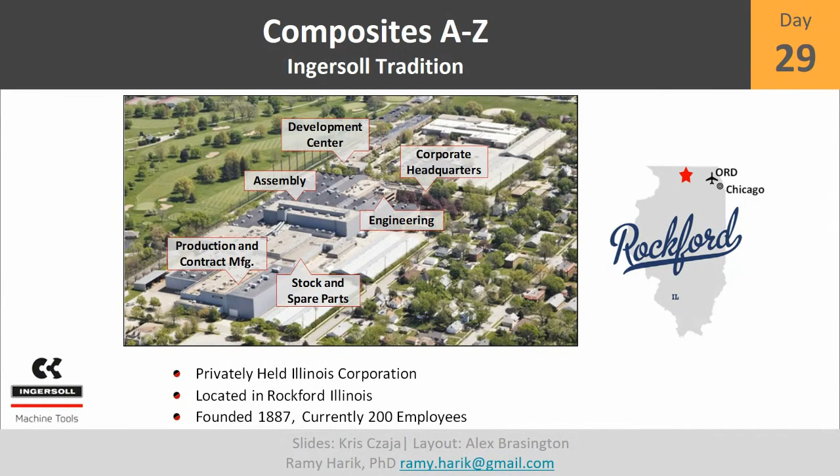Sure. Yeah, so Ingersoll has been around for a long time. This is a shot of the aerial view of our facility. All the big buildings you see there, that's all Ingersoll campus. The golf course just behind the building is actually the Ingersoll golf course as well, founded in 1899. Even all the houses around there were basically built to house Ingersoll employees as the company was revving up. So it was founded actually in Rockford - where we are right now is in Rockford, Illinois, and we've been there since 1891, I believe.

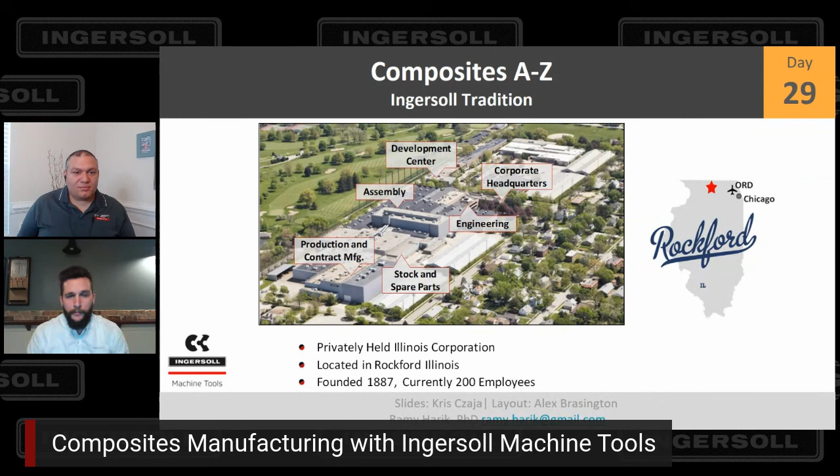For a short period of time, we were actually in Ohio, and then they moved the company to Rockford, Illinois, because of its natural beauty, and it already had some tradition for fine craftsmanship - for building pianos and furniture and things like that. So there was a workforce already available that the original founders basically built on and used to start building machine tools. We started pretty quickly getting into very large scale machines - by 1906, we had already built the largest milling machine of the day at about 400,000 pounds. We still continue that to this day, just building really unique, really large machines.

All right, this is awesome. So I'm trying to situate myself.

When is this... so this is the engineering building. I'm trying to remember where the entrance is. I've had long walks in Ingersoll, and it's been crazy, but I can't situate where the entrance is. Is it here, next to the engineering building? Yeah, basically—that arrow on the engineering building is pointing towards the entrance. It's kind of between the development center arrow and the engineering arrow, right on that edge of the building, that's the main entrance. Okay, I've situated myself. Despite the size, it's surprisingly not big enough.

I know you said you've gone through lots of walks through there, but we're actually in the process right now of expanding. We built the DKIST telescope that recently came online and started taking pictures of the sun for us, which is really interesting. We built a framework for that, and now we have another contract for the Giant Magellan Telescope, which essentially means we're putting an extension onto our building to satisfy that contract.

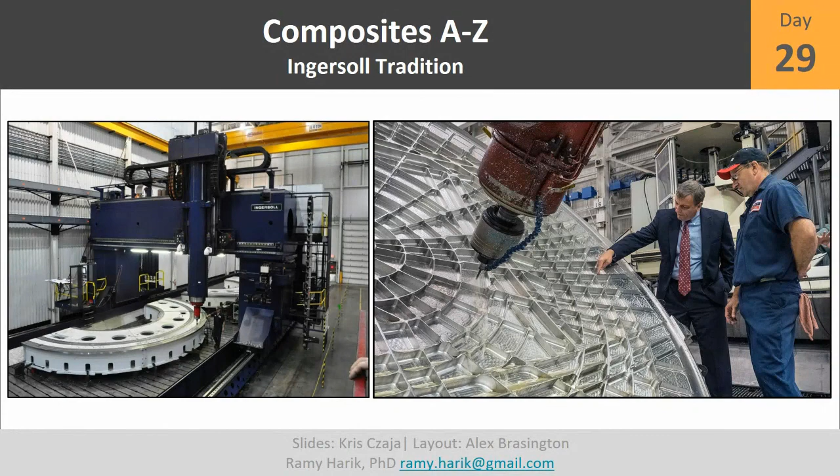So just to get a scale of this for people looking at this, I'm going to maximize the screen so you can see it on a larger scale, and look at the person in here—so that is the person. This is the size of the machine, and how gigantic is that? And this is the person in the machine, so this is pretty much impressive.

All right, and that's not necessarily the largest—we've built bigger machines than that: 5-axis, 6-axis, 7-axis, 8-axis, and we take basically all of that tradition and apply it towards our AFP machines as well. So the terminology 'axis' for those of you listening has to do with degrees of freedom. The added degree of freedom adds an axis for a machine, and it's not linear—if you add complexity, if you add a degree of freedom, you're suddenly tripling, if not exponentially increasing, the complexity.

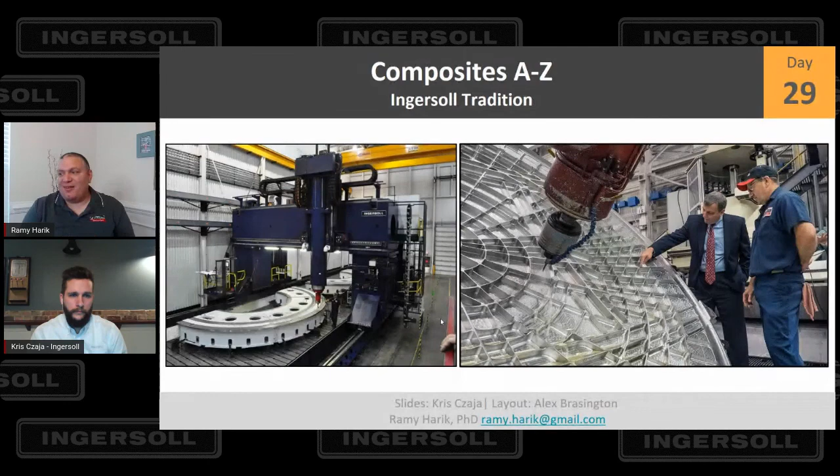Alright, so this is a composites show. That's good, we started with the tradition at Ingersoll. Talk to us a little bit about the AFP evolution, and of course we have a couple of cool videos prepared. But what is it that we're seeing here on the left and on the right?

Sure, so these are some of the original Ingersoll AFP machines. We kind of got into the large scale AFP space as soon as it was available. The machine on the left is an Airbus machine, and the machine on the right is in Alenia—Alenia is one of our largest production sites. We have 7 machines producing the 787 fuselages out there in Alenia. Those machines at Alenia are 32 by half-inch tow AFP machines, producing 787s all the time.

Yeah, I wanted to tell you the left one looks like an Airbus machine because they have their manufacturing process a little bit different, whereas Boeing has chopped their aircraft into sections of barrels.

Airbus has these different joining processes for them.

Going from that, I'm just trying to brainstorm for the world of AFP. Which one would you recommend? Do you prefer not having hoops, not having these circular patterns, versus having these joints, from an AFP perspective? Both of them, they are design-wise—this is not what we're assessing, a design. I'm assessing from a manufacturing perspective. Which one do you think would be easier?

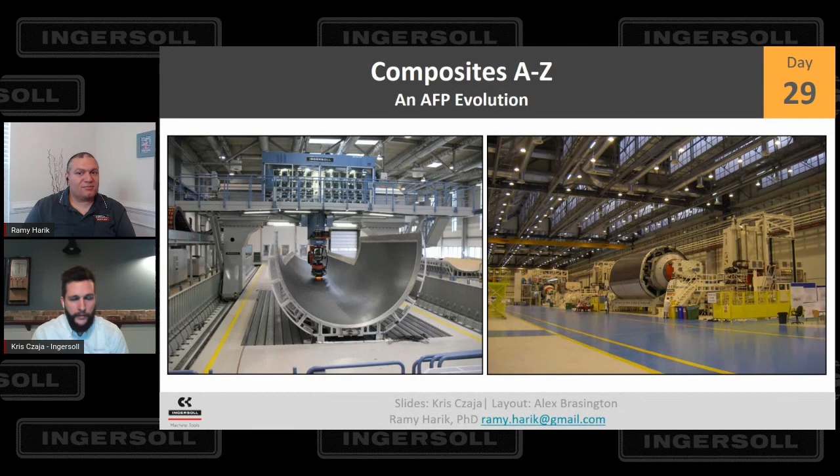I think they're about the same. The machine complexity ramps up a little bit with the barrels, with the headstock and tailstocks, because you have additional axes there. But it also allows you to go a little bit faster, because on the machine on the left, basically you have your XYZ axes that dictate how fast the machine can lay up. On the right-hand side, you could take advantage of that rotisserie in front, combining your XYZ linear feed rate with the rotisserie feed rate. Using that setup, you can go beyond the capabilities of just the linear axes.

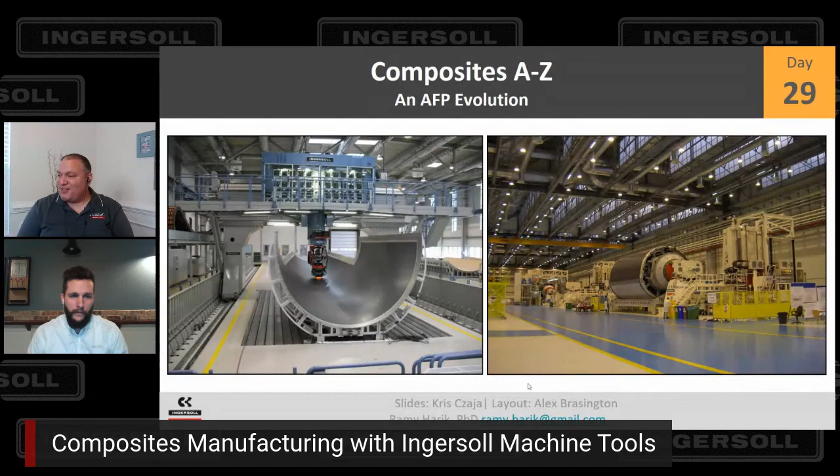Yeah, I totally see that. I was also thinking of programming. I don't know if this is a very quick assessment from my side, but I feel like the programming of parts that don't have these hoop elements will be a little bit easier than the other parts. But I guess it has to do with different—there are multiple reasons why you make a design a certain way or the other way around.

So, what is it that we're looking at here? We're looking at an up-close picture of the creel on the head-supported type of mechanism, and on the other side we're looking into—tell us a little bit, what is it that we're seeing here?

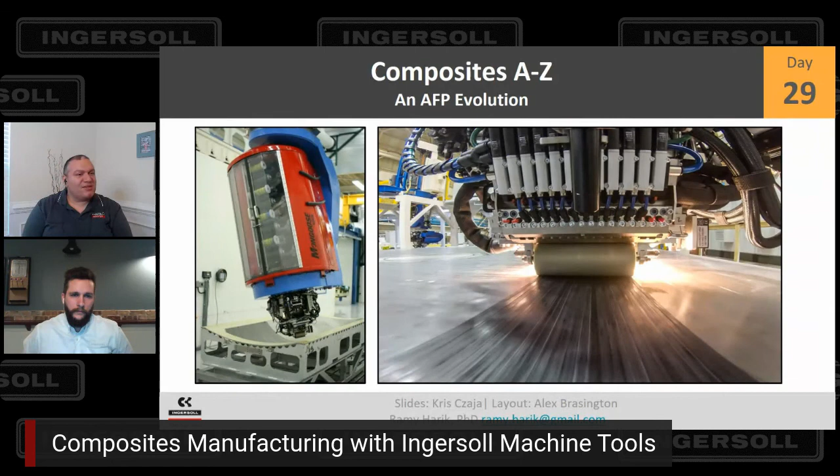Sure, so this would be kind of what we consider the next step in that AFP evolution. Those original machines had the creel housed off of the head, kind of far away—that was the way it was done originally. This is when we introduced our Mongoose module. We basically shrunk down that creel house and brought it closer to the head, but still allowing a lot of flexibility. This has been kind of Ingersoll's niche for a while. I'm biased, but I think we truly make the most flexible, capable AFP machine, and this Mongoose module was a large part of that.

We still have the ability to refrigerate and control humidity in that creel, but we bring it close to the head and reduce the contact points of the tow path.

So let me ask you a question. You're saying modularity—does this mean, like, I can imagine, and if I recall my memory the answer is yes, but I'll go ahead and ask it to you: the head can be deposited and you can pick another head and continue the layup while the operators are refurnishing the head with material and so on?

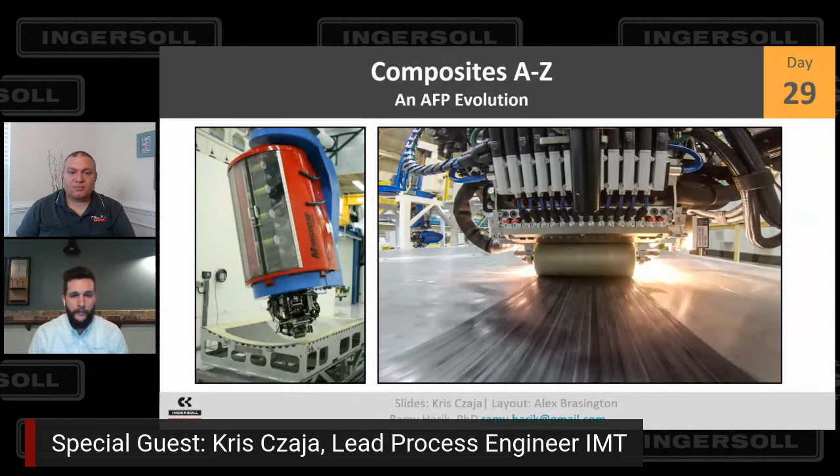Yeah, absolutely. So the image you're looking at on the left was our first Mongoose—that one is not modular, it's a fixed creel. But the one on the right is actually one of our more recent machines, there's an image of it a little bit later. That machine has several different end effectors, and they all can be picked up and dropped off automatically. It has two different AFP modules, both 24 by 1/4 for redundancy. It has a tape laying module, and an inverted robotic module that itself can pick up and drop off an inspection system and an ultrasonic knife.

So sometimes I do have questions—there are tons of people saying these are impressive, huge machines. I have a question: what is the porosity content in the cured composite from the AFP process? I don't think this is really relevant to what we presented, but if you want to take a stab at this question from Kumar.

It's kind of hard to answer. I think it really depends on your process and the material that you're using. Definitely, we want to be below that 1% level, I think for most of our thermoset layup processes, but it can vary dramatically. Your process can adjust to account for different porosity levels that you get raw coming out of the AFP process.

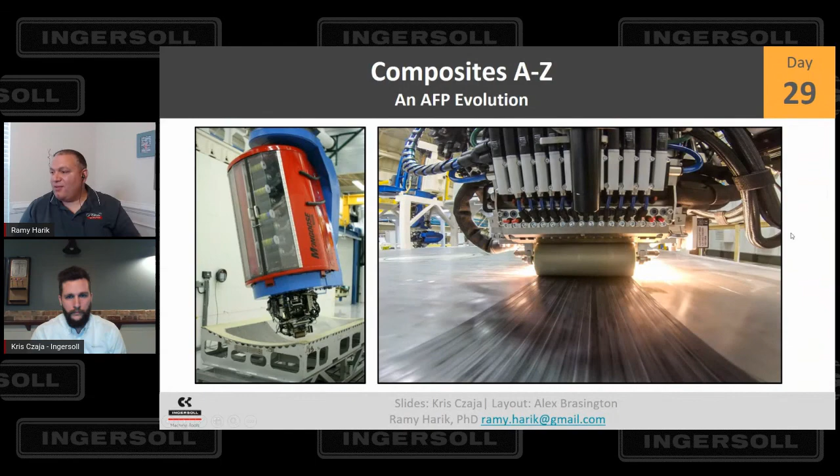Is that the machine that can actually go even all the way, manufacturing in the center and also on one of the sides? This is actually a pulled-out view of the machine that was on the right in the last image. It has two different AFP modules, the tape laying module, and an inverted robotic module that can pick up the inspection system and ultrasonic knife. This is, as far as I know, the largest gantry AFP machine in the world right now. We beat our own record when we made this one. It's 9 meters between the columns, and 14.5 meters of total wide travel.

So what the modules can do is they can actually go outside of that portal. Off to the left, there's a cantilever on the y-axis. So we can move outside of the portal and lay up on a headstock, tailstock outside of the gantry.

This is impressive. Where is this located right now? Are you allowed to say that? No. Okay, good, so that's a fair answer.

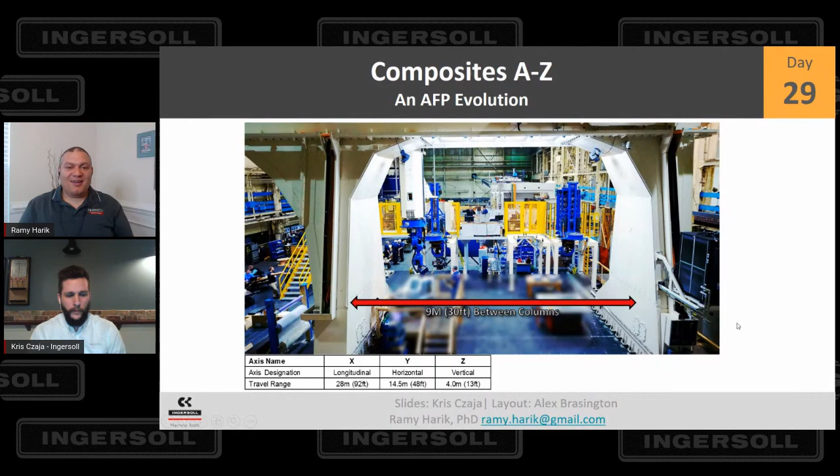Okay, all right, good. So talk to us a little bit about this slide. I can see in here the usage of the robotic arms as well as inverted processes. This looks like you guys have inverted the process: the tool is held by the mechanism that has the flexibility, and the head is stationary. So talk to us a little bit about this. And I have a question myself, like why would we be interested in inverting the process?

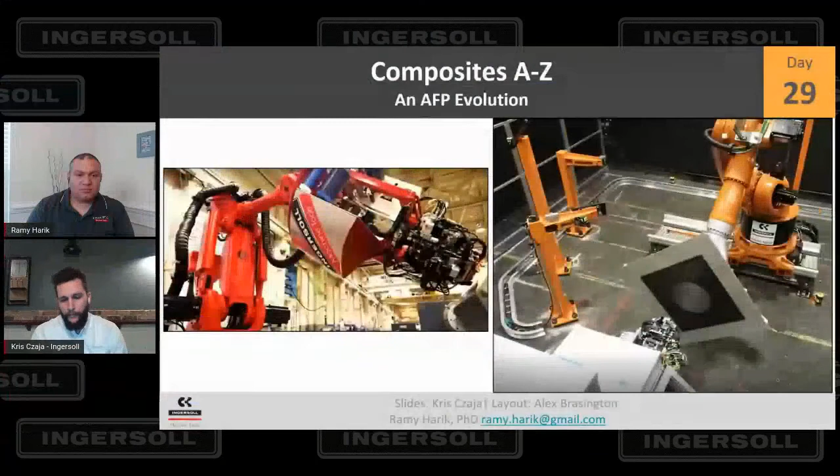Sure. As you've seen, we make really large gantries, but we understand that there's also a need for smaller AFP systems, what we'd call our mid-level or entry range for AFP purposes, or if you're manufacturing smaller parts and don't need a very large gantry. We do offer these robotic systems. There are some trade-offs there. A robot is just generally not going to be as accurate as a gantry, especially not the kind of gantries that we do, given the history we have and the kind of accuracy we're able to achieve on those gantries. But it has its place. It's less expensive, and it can be versatile and fast.

So on the left-hand side, there is what we would call our direct robotic fiber placement system, where you have the creel housed as the end effector on the robot. On the right is what we call our inverted system, where, as you mentioned, it's holding the tool and the creel is stationary. The system on the right is currently laying up a CDS, just a calibration plate that we have, but it's really designed for complex shapes in fan blades, composite fan blades. So that's a relatively small part, and having an inverted system like that, it's extremely fast, and it allows you to have modularity without changing end effectors. In this case, the CDS is facing the fiber placement module, completely stationary, completely fixed tow path, so very, very reliable.

And then it can rotate at the 45-degree angle. That's where we have our ultrasonic knife module, so the robot can basically just turn 45 degrees and access the ultrasonic knife, and then it can rotate fully to 90 degrees, and we have an automated inspection system there. That's our access system. Let me get up close a little bit to the slide so people can see that, and I'm going to be moving the mouse. So basically, you stated this is a CDS.

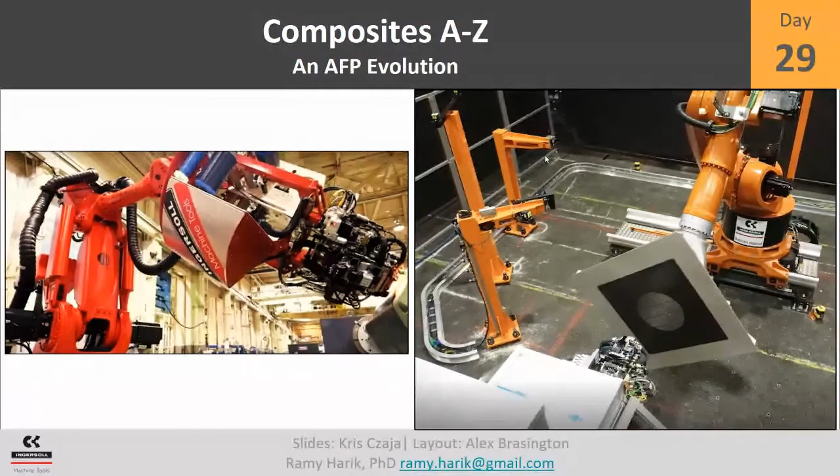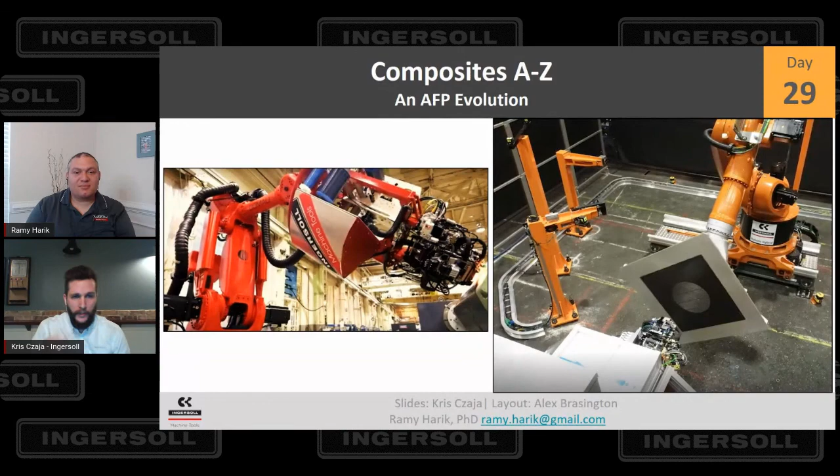We rotate 45 degrees to this location, where there's an ultrasonic knife for cutting operations. Then we can rotate 90 degrees and have profilometry-based inspection in this location. Is that accurate? That is accurate. And not pictured, but off to the right, there's also a built-in projection system. So just by rotating the A1 axis, I can access all of these different modules and functionalities. That is interesting, I like this.

All right, cool. So talking about the AFP Evolution, what is this, what are we seeing in here? So what you're seeing here is one of the newer products from Ingersoll. This is what we call our Hawk module. We talked before a little bit about our older creel houses housed off of the head, then we go to the Mongoose module, and this is the Hawk module.

So what you get here is a very ergonomic, very reliable head, very simple tow path. Everything is all fixed in place, and you gain easy access to all of the spools from a single location. You pay for that to some extent in flexibility of the machine to get into female parts, which is where our roll kinematic in the Mongoose module is really powerful. But for larger structures that are dominantly male, or what we call locally flat, without a lot of curvature, the Hawk module is really a great option.

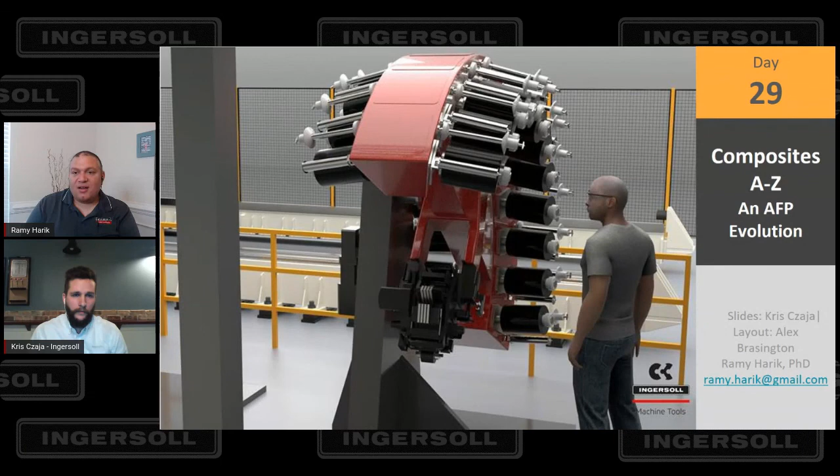All right, this is awesome. So looking once again into this, do I see in here that you can actually mount... I'm trying to count as quick as I can and I cannot count. How many, is this 32? This is 24 total. Okay, this is what got me off, 24. That's not really conventional. Is this 24 half an inch, or is this 24?

I think this rendering could be either one. We can house a 1/4 inch or half-inch spool, you just change out a few head components. It's even modular in that regard. But this one, I believe, is 24 by 1/4 inch is what it's showing.

And you would be putting spools from both sides, so am I seeing that correctly? From both left and right, this is where the head of the machine, the placement mechanism is, and this is where the creel is located from both sides. Correct. And this is obviously just a rendering, but this system is in production, we've sold this system now.

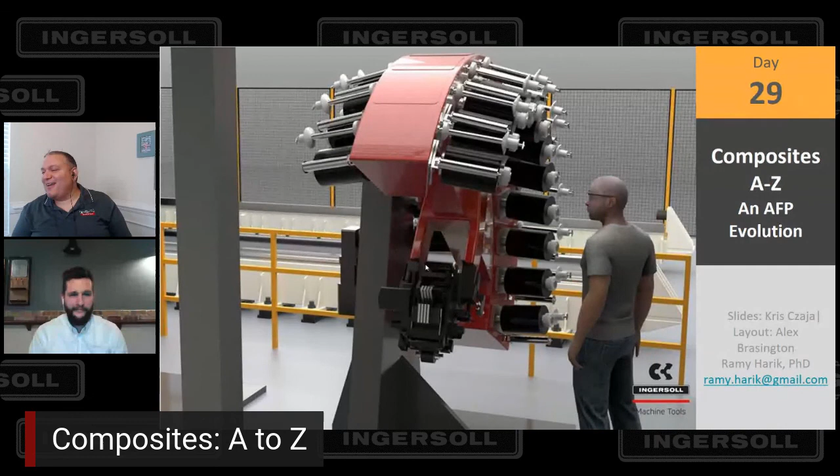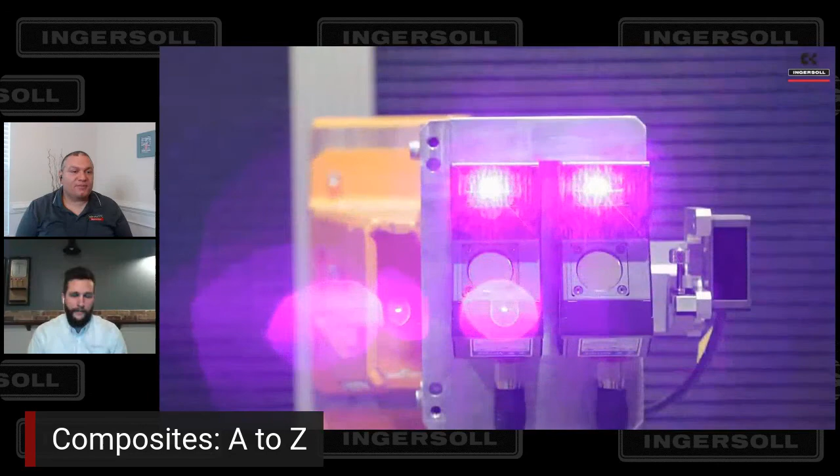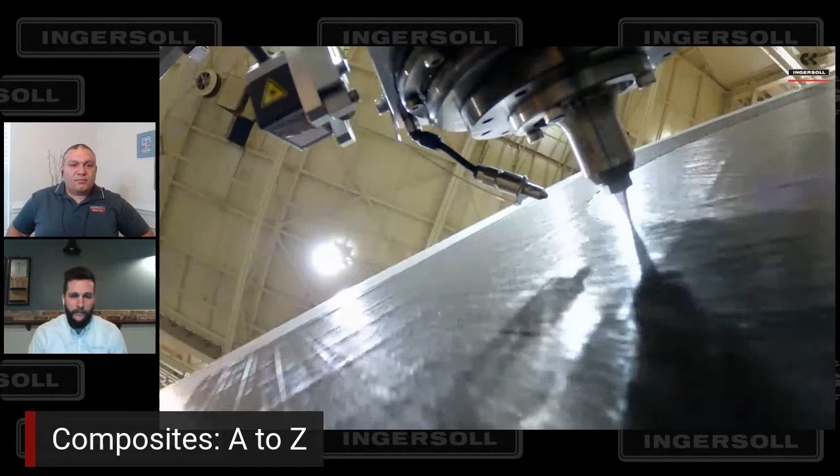All right, so we're gonna play a video next, hopefully it works well. We said we're gonna comment on this, Kris. So this is a video of our inverted robotic system, it'll show you very briefly a little touch on each of the functionalities of the system: AFP, ultrasonic knife for trimming, ACSIS for inspection, and then the projecting system.

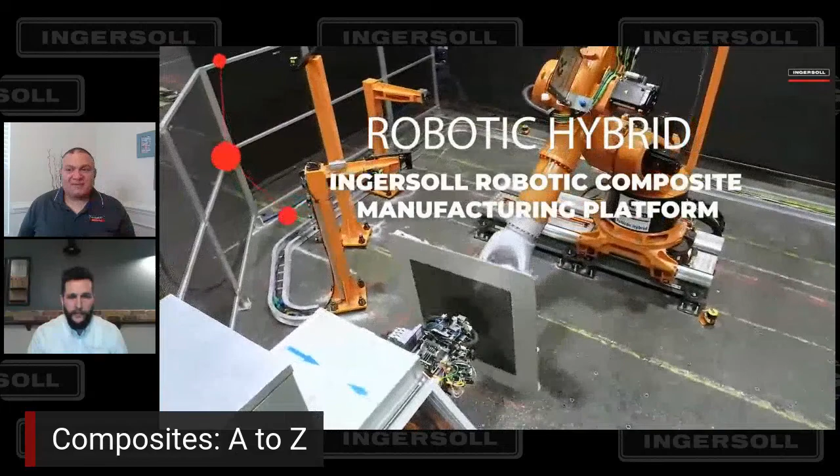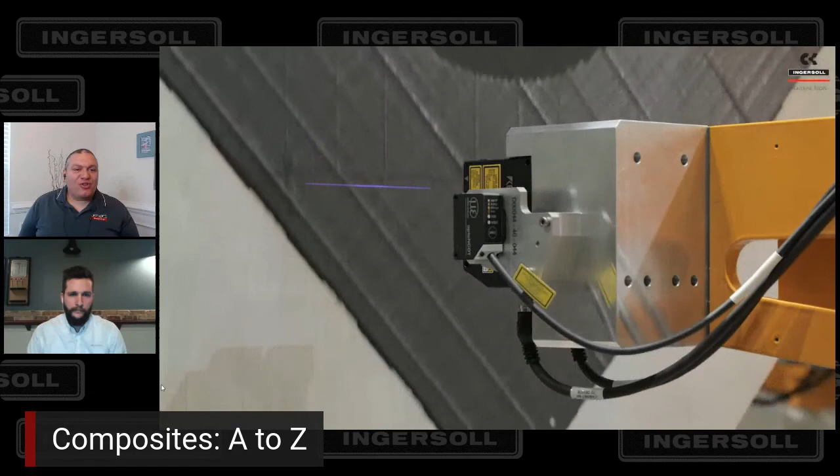So you see here the robot is doing the AFP process. It's a little bit choppy for me, but I hope it's coming through for others. Yeah, it is coming through. Talking on top of videos on the bandwidth is not super optimal.

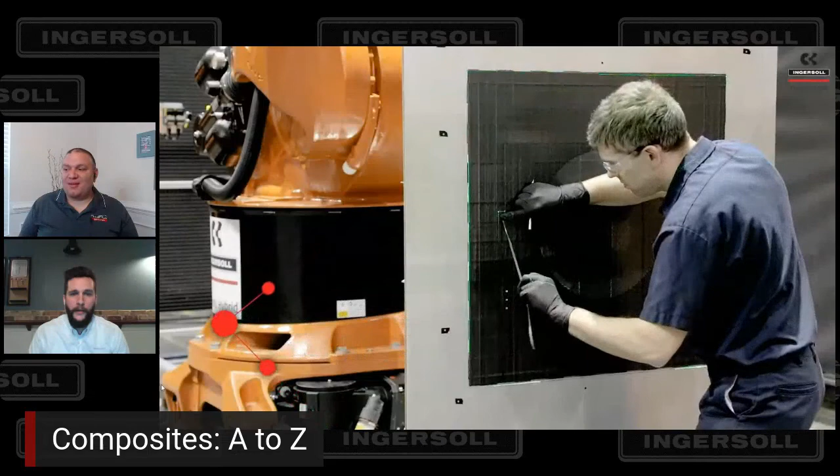Right, so there it just did a profilometric inspection, and here we have a projector which is highlighting one of the defects that the operator can repair. And then a close-up shot of that ultrasonic trimming operation as well.

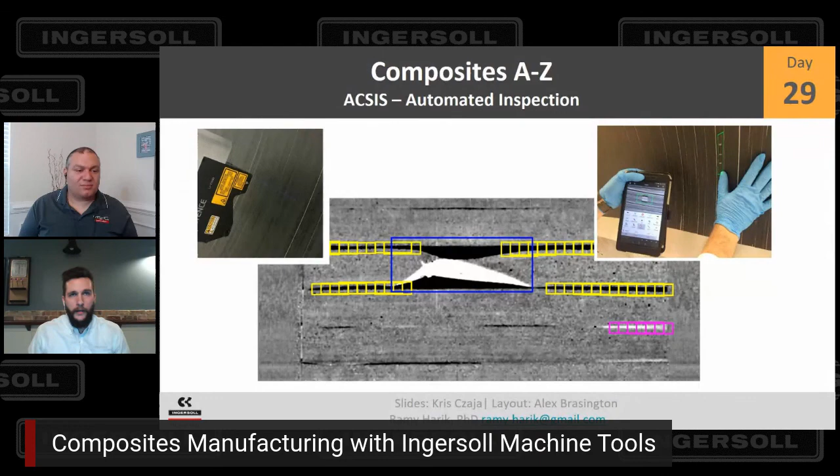We also have a smartwatch interface, which is basically the same functionality as the tablet, just on a smaller screen, so you don't have as much real estate there—it just shows one defect at a time. And then we also have an augmented reality interface using the Microsoft HoloLens, so your hands can be completely free. Augmented reality is really interesting; it allows a lot of different capabilities in terms of the information you can convey to the operator. It's a really rich, deep source of information.

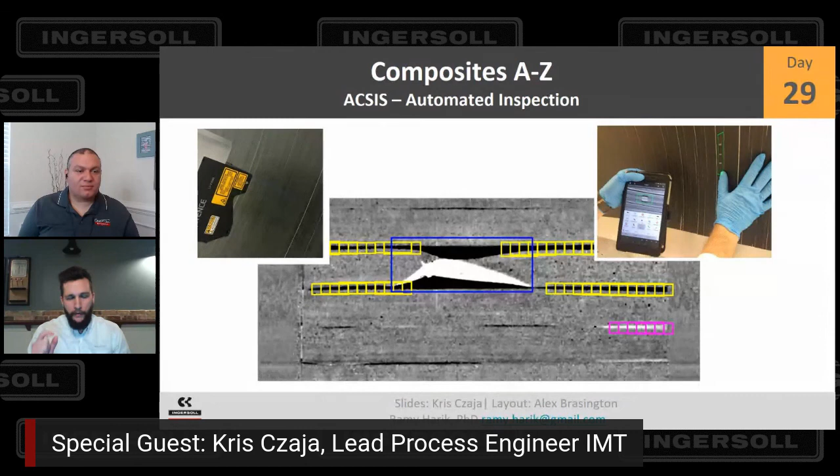But at the same time, you pay for that—there's always some give and take in positional accuracy. Whereas with the projector you can get really sub-millimeter accuracy in where you're projecting the location of these defects, the HoloLens and augmented reality is more of a ballpark, I'd say—more like centimeter accuracy. It's enough to point you toward that defect so you can go repair it, but if you need really precise boundary projection, for example, you're not going to get that from the augmented reality system. Not yet, anyway.

Yeah, we'll see. So you mentioned several things—one of them, facility. What Kris was talking about is the McNair Center at the University of South Carolina, this is where I work. And tomorrow we're actually going to have the finale of the 30 days with my research team, and we'll see that tomorrow.

I do have a question for you from Dr. Al-Najm. The question is, what measurement sensors are being used in the inspection system?

So these are Keyence profilometers. I don't think it's any secret that we're using Keyence, so I can go ahead and say that. I think you can actually see it in that image there. Yeah, the end of the word Keyence.

So we use a profilometric system. We kind of played around with image-based systems, using standard cameras. But the profilometry we find is so much more rich. You get that height information naturally. You're not going to get hung up by glares and things like that.

And then also there's a lot of little details people don't think about immediately with automated inspection: what do you do with all that data? We talk all the time about this digital thread and maintaining it. So if I have an automated inspection system and I've taken a bunch of high resolution images, what do I do with all those images? I can't just throw them out, because then I'm throwing out all the data I've gathered, and my digital thread is slightly severed, if not completely severed.

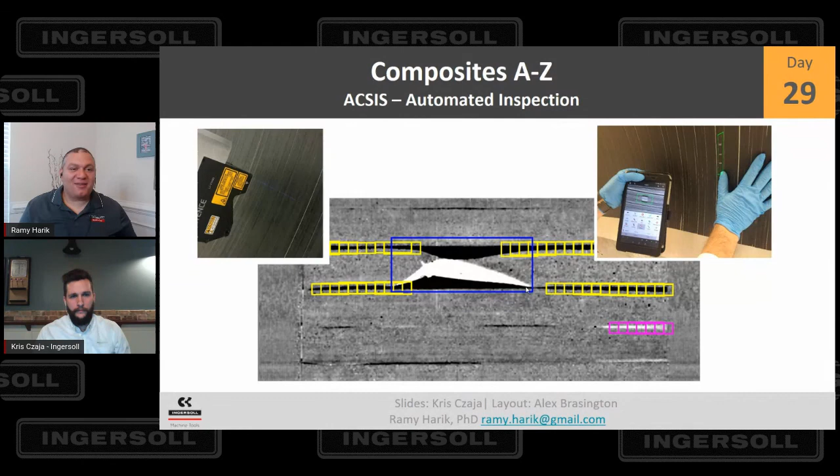You were right about something, Kris, is we can talk about this for 5 hours because we've spent on this chart the most since we started.

Talk to me a little bit about this full modularity. Is this what we're talking about? AFP machines that can drop a head, pick a head, and move the operation. There's something very particular I see here, milling. Why do you put milling in this loop?

So for a while now, Ingersoll has been driven by this modularity concept. We don't want you to have to purchase a new gantry to have different functionality, so we make all of our modules modular, as it were.

So everything from AFP to ATL, inspection, ultrasonic trim, all of these things go along with that automated fiber placement process. But then we also have a teaser for the next slides here, our large scale 3D printing and our mill heads. So you saw some of our tradition in milling.

So we're bringing all of those things together. In theory, you could basically 3D print a tool, mill your surface on the tool, drop off those modules, pick up an AFP module, and then AFP directly onto the tool that you just 3D printed. We want to leave that option open to anybody that wants to play around with it.

In reality, there are some hurdles to get over because you typically want an AFP in a clean room environment, and milling is inherently not a very clean process. But still, thinking towards the future, we want to make it an option so that whoever comes along and says, I have a use case where I want to do printing, milling, AFP, and automated inspection all on one machine, that it's right there, ready to go.

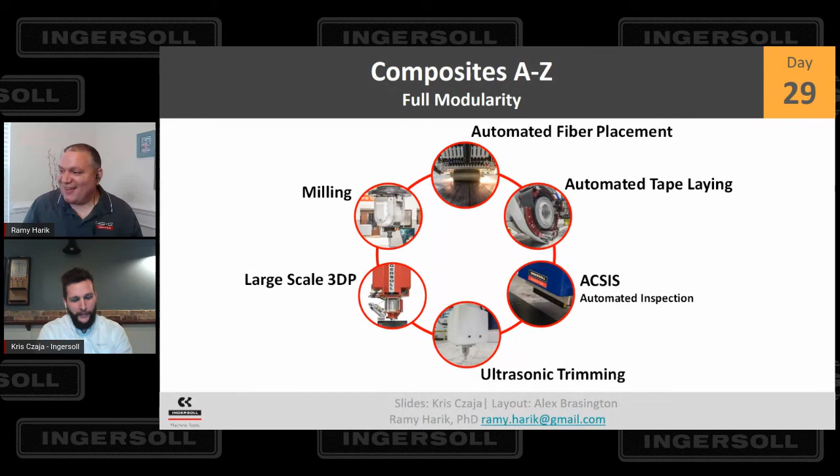All right, awesome. So I've often stated one of the biggest problems is tooling, the problem of creating tools for AFP machines, rapid tools and cheap tools, especially in the R&D stage where you don't want to make an Invar $500,000 tool, and the lack of such equipment.

But I did mention in one of the lectures before, I forgot which one, that you guys have a giant 3D printer. And we're going to be seeing in a little bit the 3D printing of the boat at Maine University. So talk to us a little bit about Master Print and what is it that we're seeing. I'm going to maximize the slide so people can see that.

Sure, so Master Print is our large scale 3D printing machine. Typically, we're printing a thermoplastic resin with some sort of reinforcement material. Most of the time it's going to be carbon fiber, but depending on the application, it could be glass fiber. It could even be a natural fiber like a wood flour.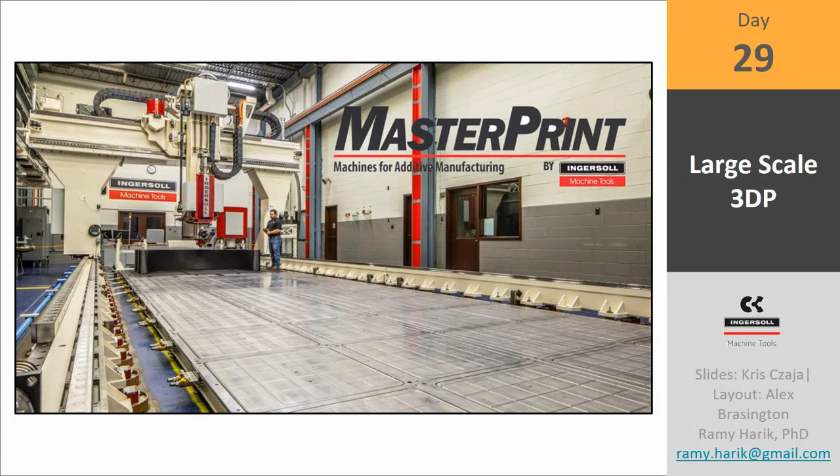And it really smells good when you print those materials. It smells like a wood shop.

So what you're seeing on the screen there is our MasterPrint that we have in Rockford. This is, again, a newer product for us. This machine was installed a couple of years ago, commissioned about a year ago, I want to say, maybe not even, maybe half a year ago.

But yeah, we have this machine in Rockford, so we welcome everybody to come to us and try it out. We recognize that this is a new process and we're all kind of learning together. So we wanted to have a machine that is really dedicated to doing a lot of this R&D and exposing this technology to the world.

Again, you can see there a person for scale. That's your old buddy, Brandon. Oh, that's Brandon.

He's kind of a short guy, but you can see him for scale. This machine has got a 12-meter X-axis, a 2-meter Z, and 4 meters between the columns. And what he's standing on, what that's printing on right now, is a vacuum bed. We basically roll out an ABS sheet, suck it down with that vacuum, and that serves as our print bed, so we can print some really large structures.

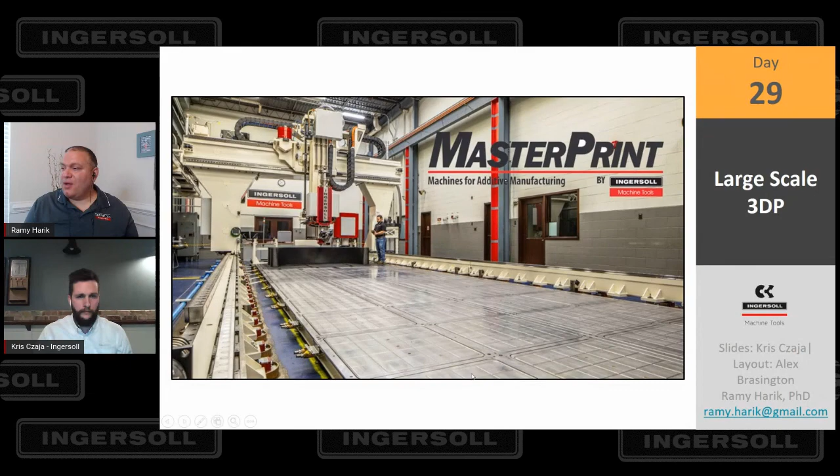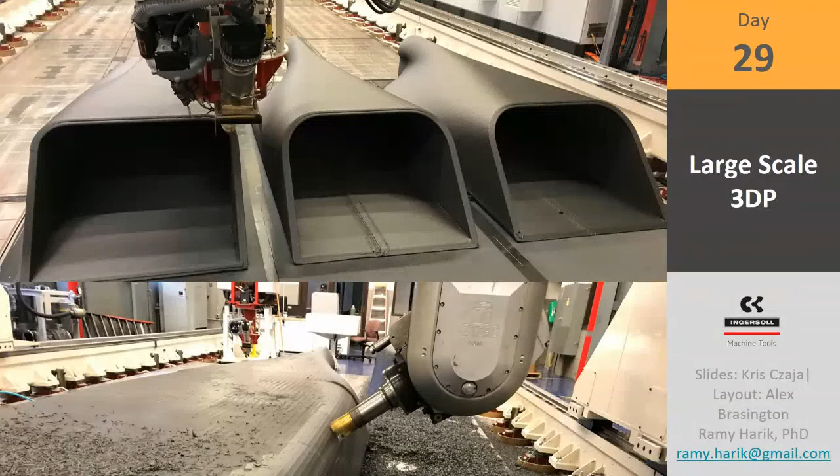All right, awesome, so let's talk a little bit more about what we're seeing here. This is up close to this larger scale 3D printing. Yeah, this is kind of medium scale 3D printing actually, but it's some pictures to show that process. So what we're actually printing here is simultaneously 3 sections of a model, basically a wave pool model for a large tanker. And then we mill it. In the bottom picture, on this machine in Rockford, we have that modularity concept again, 2 different modules - the 3D printing module and the mill module. The 3D printing module is sitting off in the background there on the stand, and the mill module is providing that final surface for us.

And you can see here, when we're printing, we're actually slicing and printing at a 45-degree angle. This goes back to that CTE thing, which is really important for us. If we print purely at a Z level, or 0-degree orientation, if we slice only at that Z level, we get a lot of warping, kind of potato chipping, as the part peels up off the print bed as it shrinks. Having this 45-degree angle allows us to take better advantage of a smaller cross-sectional area, a smaller total path for that print module to go around. It also allows us to take some advantage of the anisotropic CTE effects of this material.

Maybe that's getting into the weeds, but that's another interesting topic. Because we have these small, 1-2 millimeter length fibers in the material, you might think they're randomly oriented as we melt it down, but during the print process we have laminar flow along the sides of the nozzle, so a lot of those fibers actually align in the direction of the bead. What you end up with is this interesting and complex anisotropic CTE, so parts move and expand in different amounts in different directions. That's another topic of very active research right now, quantifying and understanding that process.

I can imagine this explodes the possibility of applications you might want to try with such a process. Yes, lots of research to go on there.

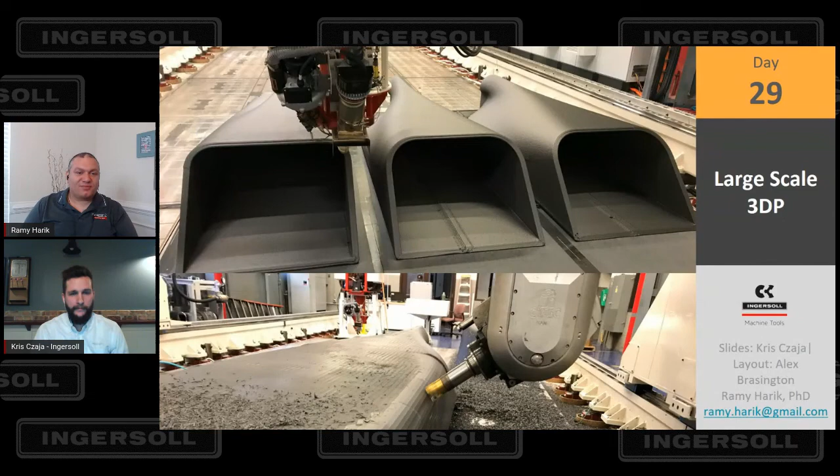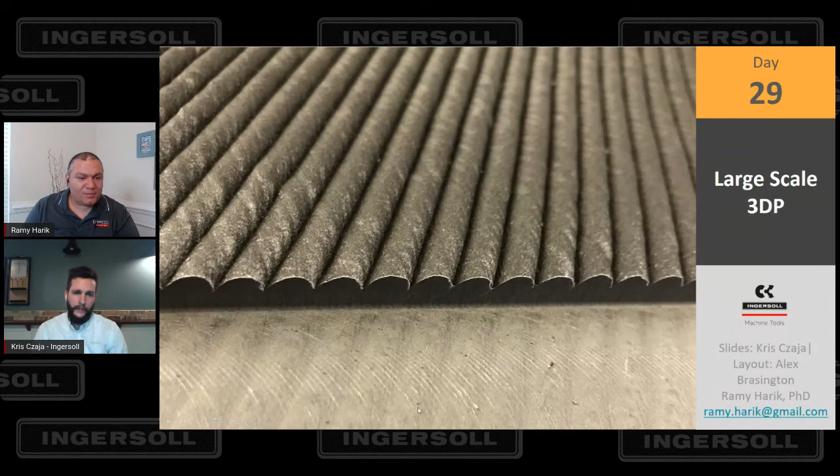Awesome. So this is an up close picture of the previous slide. The top there is the as-printed surface, where you can see the different layers. Then we come back and mill it to get a nice flat surface on the bottom. Typically the surface roughness we get from our milling application is somewhere between 0.5 and 1 micrometer RA.

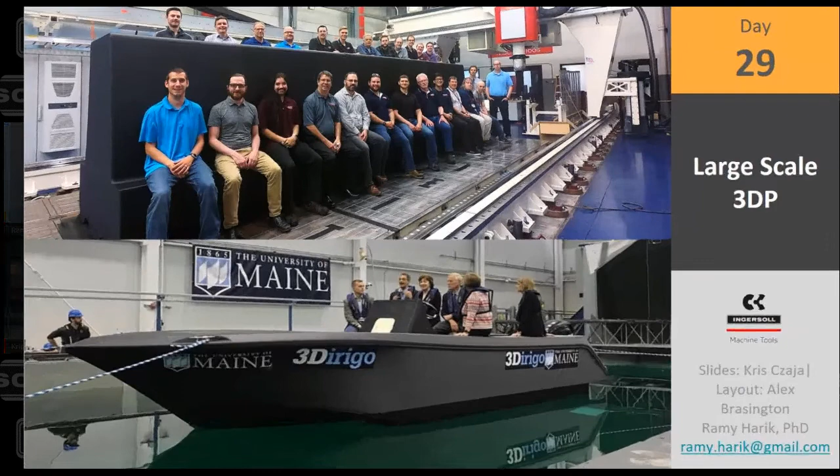So what is it that we're seeing here? This is the largest, the printed boat. Yeah, these are some of the parts we've printed in the past, showing the scale and strength of these parts. There's a number of the Ingersoll team sitting on top of this 3D printed part. I don't remember the exact size, I want to say it was like 20, 25 feet long. Hold on a second, I just realized something.

This bench that everyone is sitting on, this is a 3D printed part. Accurate, yes. Oh wow. We got a row of people sitting on one side and another row standing on the back side. Because of this 45-degree printing process, that's completely hollow, basically a shell. The 45-degree printing process allows us to print vertical and horizontal walls without exceeding any overhang constraint, so there's no internal support structure in that part.

Yeah, I had to zoom in the camera because I was looking for you, and now I found you. Here you are. Yeah, there I am. This is awesome. And what about the picture at the bottom? This is the 3D printed boat.

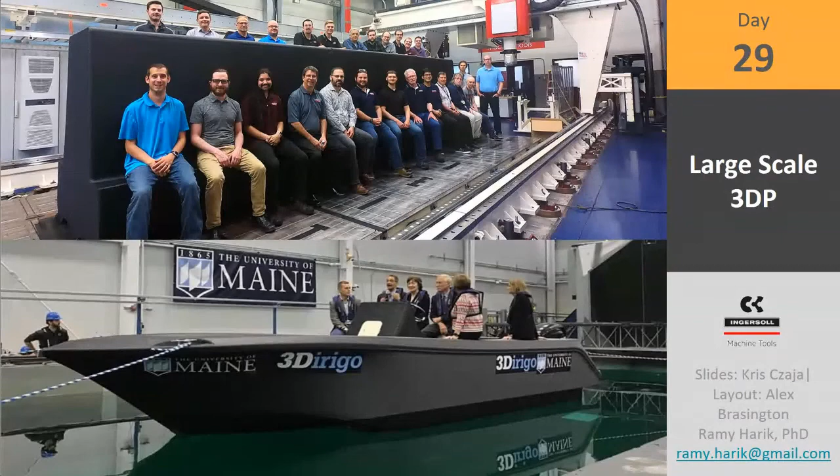That got us a lot of press. The machine on top there is our machine in Rockford, currently the second largest 3D printer in the world. The reason it's second is because the one in Maine that we sold is number one. They printed, as part of revealing this machine, this 3D printed boat - 100% 3D printed. When they did their reveal, they had a big PR event with senators from Maine there, put them on the boat, put the boat into the wave pool and turned it on. It was kind of a big to-do, really interesting to see.

Is there a video of when they turned on the wave pool somewhere? I'm sure there is somewhere. You could just search for University of Maine Ingersoll 3D printed boat, pictures and videos, and see a time lapse of it being printed. Yep, really interesting, I will definitely do that.

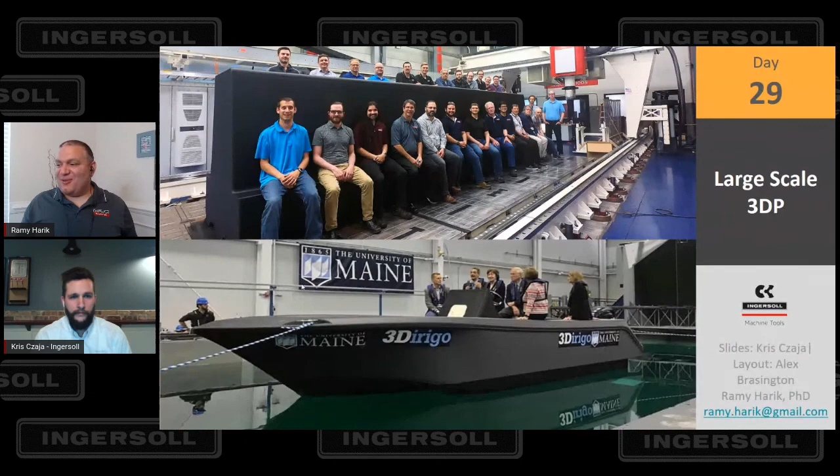So what are we seeing here? Is this the same tool from before or something else? No, this is a bigger tool. I blurred it out because it's not yet officially released in terms of talking about what it is, but as a teaser, this is by far the world's largest 3D printed part. This uses basically the full range of the machine - it's 12 meters long, just about 2 meters tall. This is absolutely massive.

So you could look forward to in the near future some more press releases about what this tool is and what it was used for.

I'm not gonna try to take guesses, but it does look like something not very far from wings or something of this kind. But hey, I am not gonna try to take guesses now because obviously you cannot tell me if I'm right or wrong.

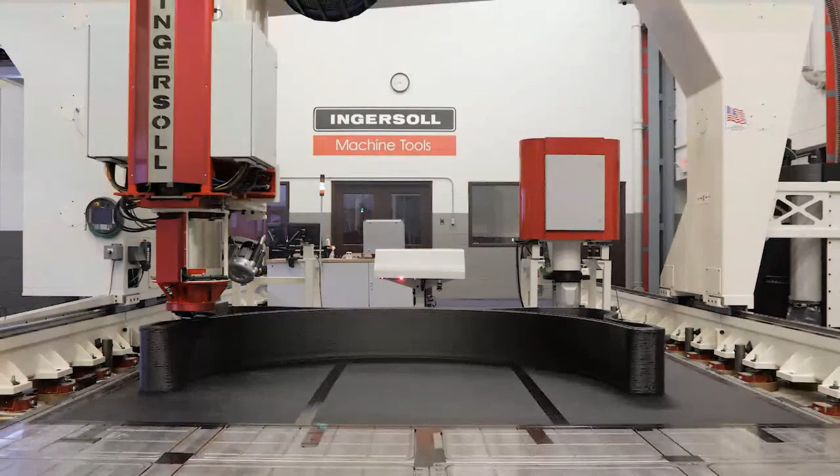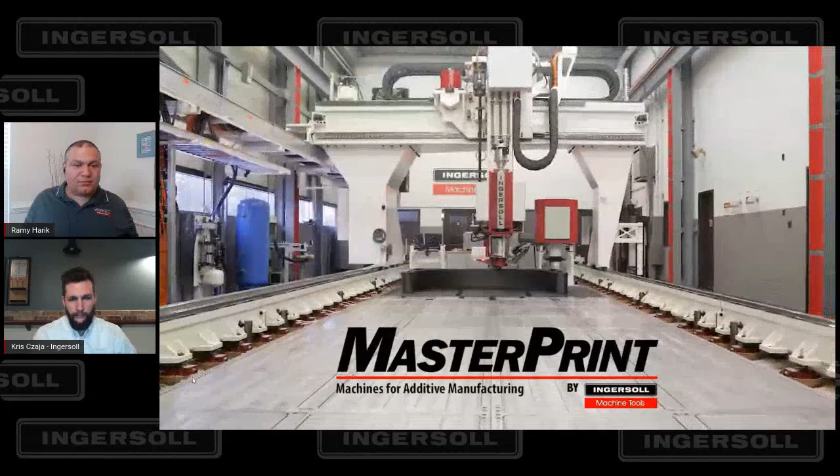Sure. So this video now is showing the 3D printer in Rockford, or MasterPrint. This one is just doing a small demo. In this case, it's just a demo for the video, but this is actually a piece of a larger tool that we printed that was basically a plug for a layup tool. So this is not an animation. This is the real machine. You see it printing live there.

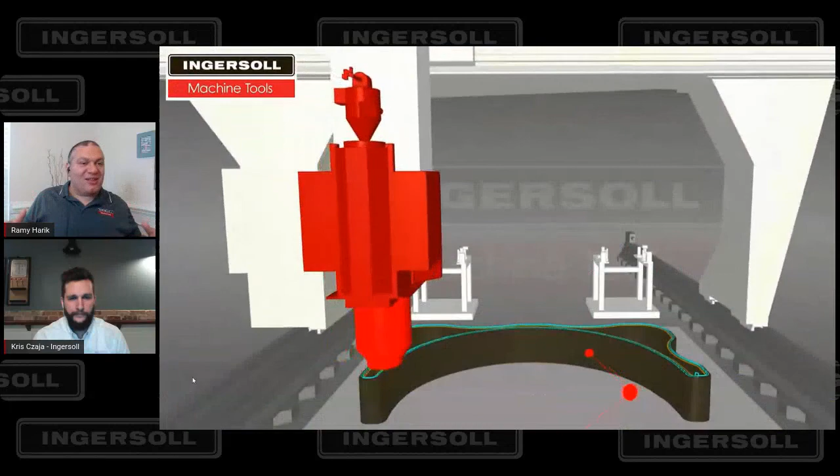Can you comment a little bit about delamination? Like usually, I'm not gonna name which company I'm thinking of or which lab I'm thinking of, but there was a lot of publicity about a certain lab that did a car. And if you see the pictures up close and personal, you see that they are cracking. It's like, hey, it looks nice, but if you zoom in a little. So how about the delamination in here?

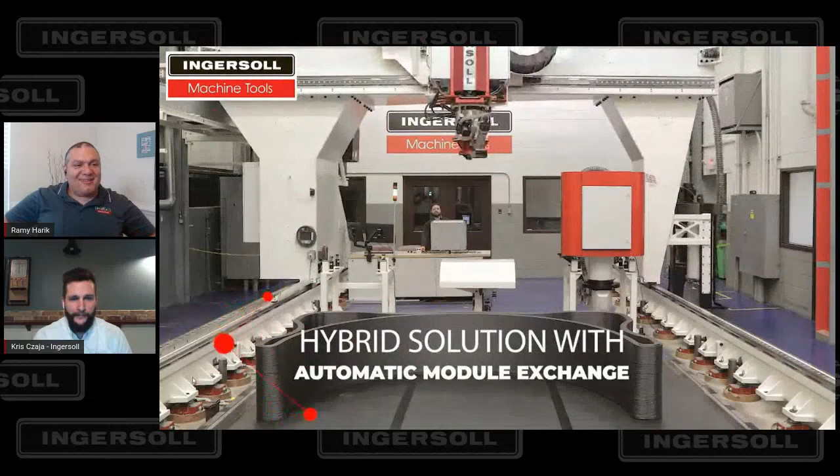Is this Brandon again? That is Brandon. All right, shout out to Brandon.

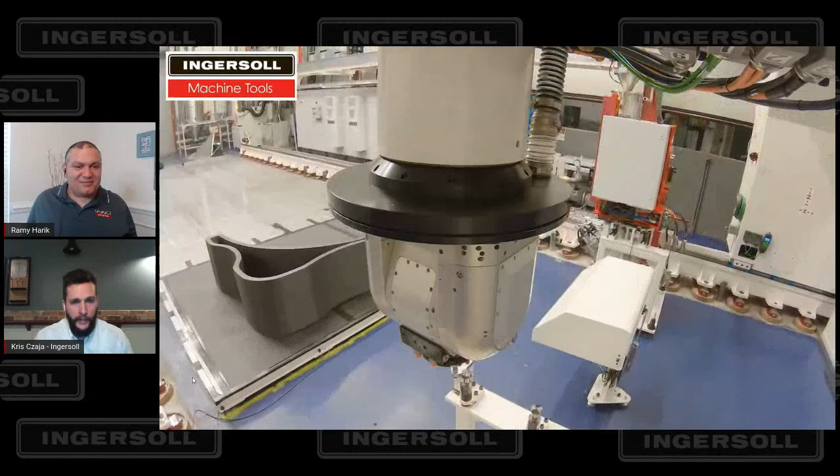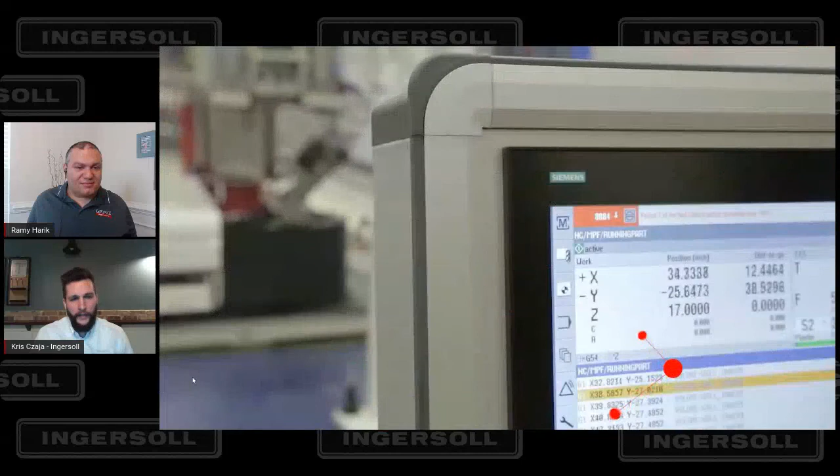So yeah, delamination is definitely a thing that you have to watch out for. It comes back again to those thermal stresses that we leave in the part. We're printing it hot and then it cools down to room temperature. One of the constraints that Ingersoll put on ourselves when building a machine of this scale - some large scale 3D printers basically print in an oven, so they could control the way the part cools down. We really can't do that because our machines are so large. If we put the whole thing in an oven, you would double the price of the machine just for the oven. So we gave ourselves the challenge of doing all of this outside of an oven, in an open environment. That room is temperature controlled, but it's 70 degrees F. It's not humidity controlled, so you have to be careful about the way that you print things. Different materials play a role with different CTEs. That 45-degree angle again plays a big role in the options that you leave available for the part to delaminate and warp and shrink.

I would say at this point, it's still kind of a learning process for everybody. We're all still trying to understand exactly what the limitations of this process are, and how far we can push it. I'm happy to say that we're pushing it further and further all the time. We're breaking world records all the time, to the point that it's just kind of like, oh yeah, we broke another world record last week.

Is it like a Guinness World Record? No? Turns out you have to pay for those things, and it's not cheap. You gotta pay some money in order to be officially recognized by Guinness. So no, we don't really go down that road, but we have a pretty good idea of what's going on in the world in this space, so we know where we're at.